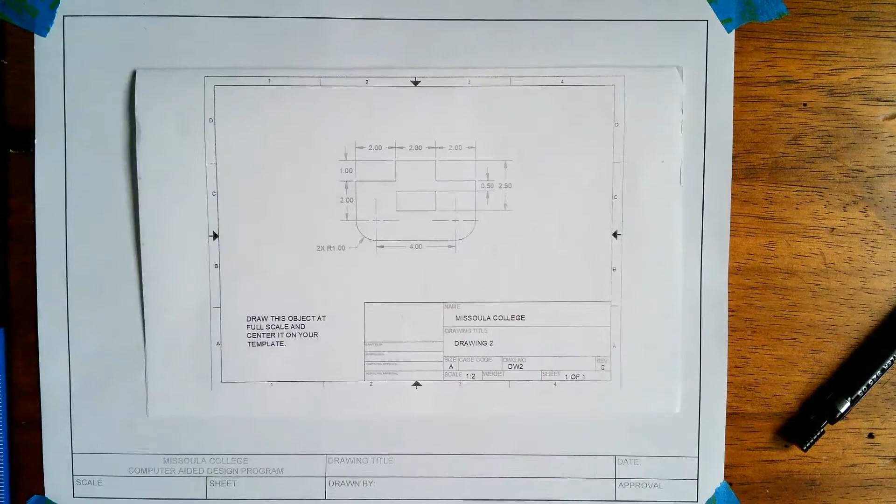Okay, so we're going to be going over drawing number 2 for the class. This was one you did as homework, so it's this object right here. I did switch up the camera angle a little bit, so hopefully this still looks okay. I tried to take the camera off the desk so it wouldn't shake every time I bumped it, but this thing will still shake a little bit, so hopefully it won't be as annoying.

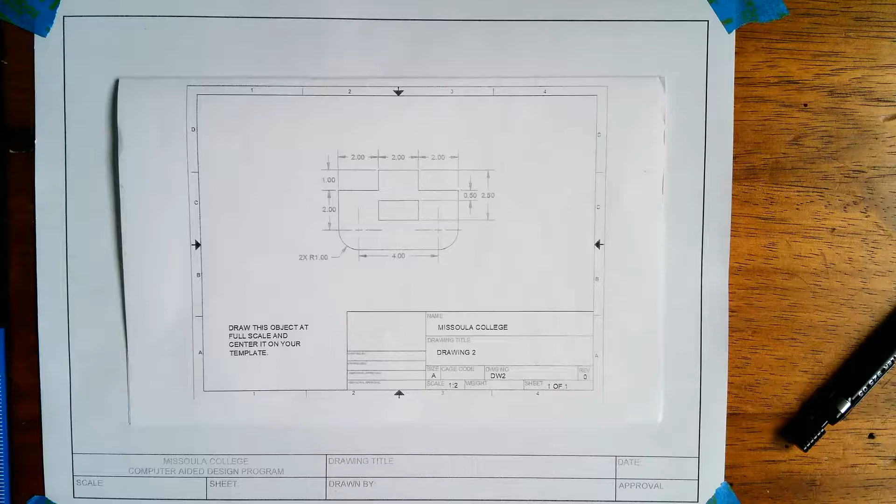So this thing is our next drawing. Now it's a little bit different because we've got some arcs. We've got like a rectangle on the inside that we need to draw, and it's not a square. But we're going to be doing this drawing the same way we did the previous drawing. We're going to find the maximum size and we're going to center it.

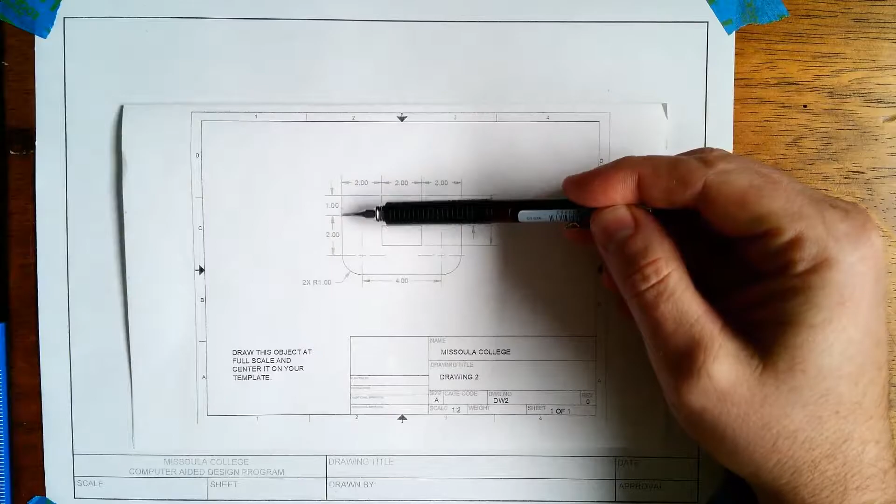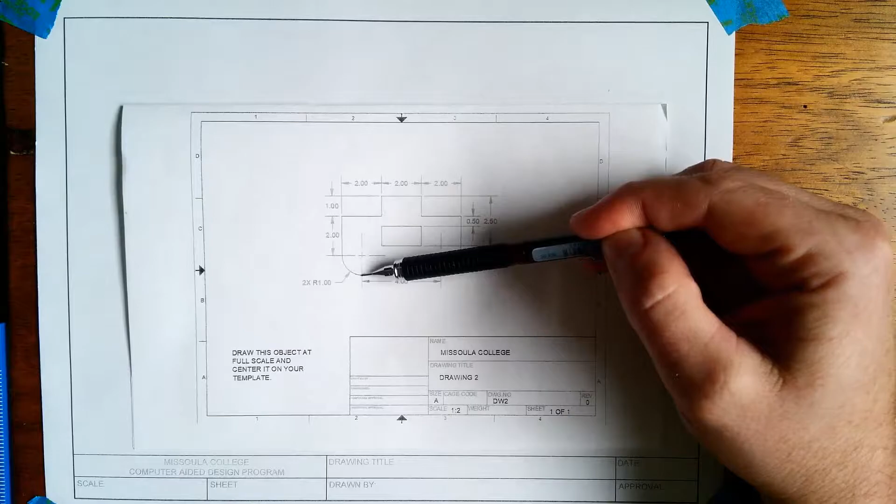So this drawing, if we go across the top, we can see that from corner to corner it's 2, corner to corner it's 2, corner to corner it's 2. Our maximum width is 6. Going down, we've got 1 inch, 2 inch, and then we've got this arc that has a radius of 1 inch. If you remember, the distance from the center to any point on that arc is the radius, and our radius is 1 inch. So from here to here is an inch, here to here is an inch, here to here is an inch, and from here to here is also 1 inch. So 1 plus 2 plus 1 - this is going to be a rectangle that's 4 by 6.

So to start, I've got my drawing sheet taped down. I did reuse the tape from the last drawing sheet, which is nice. Got my 0.5 pencil. So the exact same thing.

I've got 5.05 as the midpoint of that line, which is the bottom of our drawing area. I'm going to grab my triangle, vertical line. This should be 6.9, which if we divide 6.9 by 2, we're going to get 3.45. So 3, 3.1, 3.2, 3.3, 3.4, and then 3.45 is just right in at the halfway point.

So now, got my horizontal line going across. There's my center. I'm going to now center my rectangle on this sheet of paper, and my rectangle is 4 by 6, so it's a 6-inch width. So I set half of 6 is 3. So I set 3 inches at the vertical line, and then I can make a mark at 0 and a mark at 6. So there's my 6-inch width.

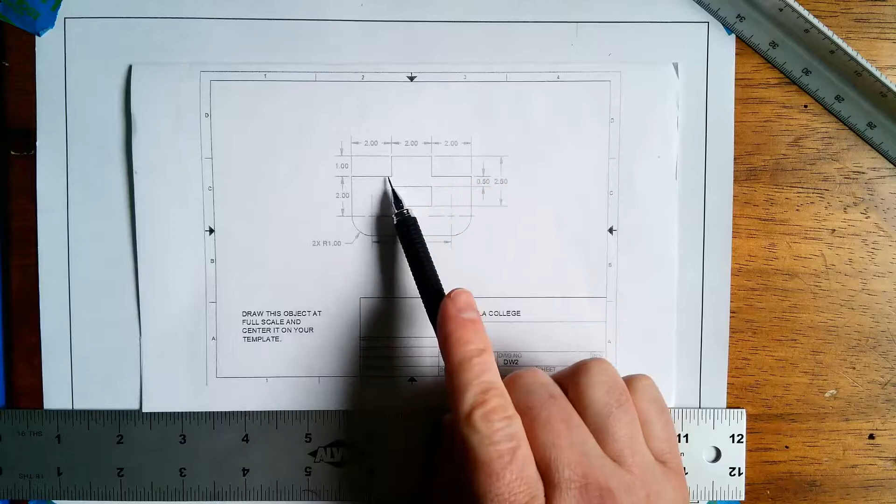And so now what I'm going to do is just start working my way in. I'll probably draw this top part first. So this is down 1 inch and then over 2 inches. Same thing on that side.

So what I could do is measure down 1 inch from this corner. I'm just setting my 0 at that top right corner, make a mark at 1 inch. And then I get my horizontal line going all the way across. Can then set my scale.

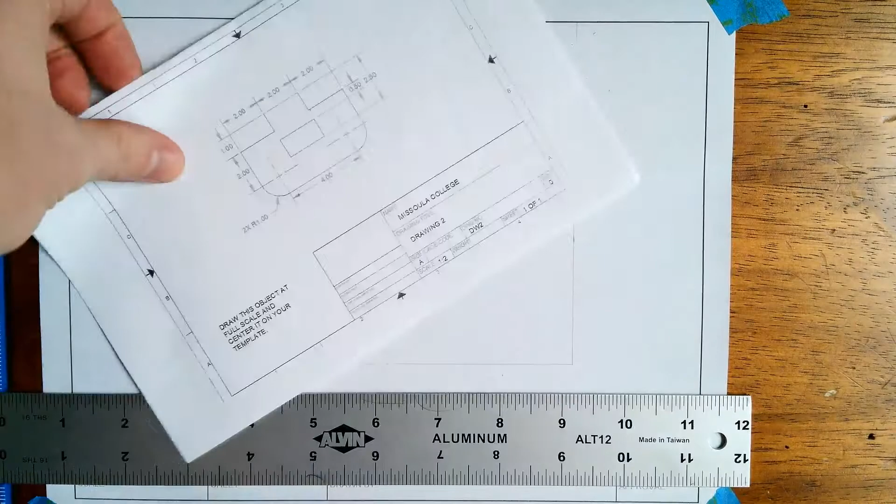I could do it here or on that top line - I might do it here. And then mark in 2 inches from this side, and then in 2 inches from that side. So I'm just making these 2 points right here. And I could draw my vertical lines there and there.

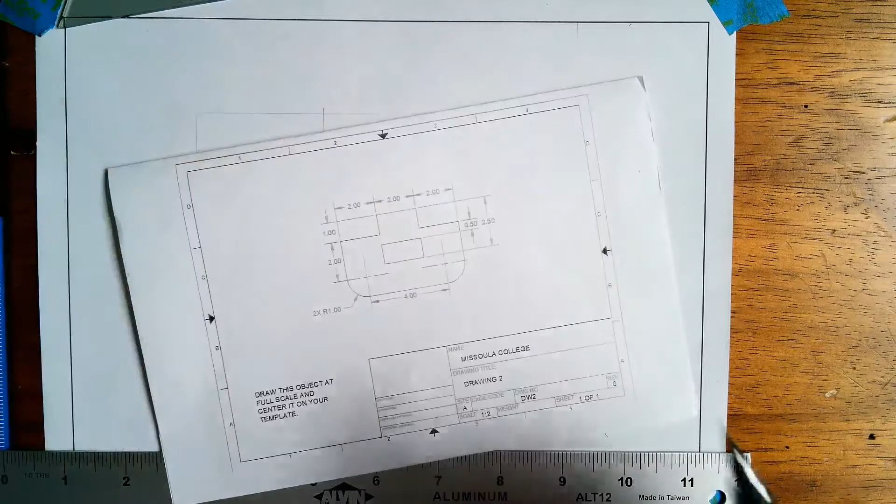Might as well stick with the outside, so I'll draw the arcs. So again, I need to find my center marks. It's going to be up 1 inch and then over 1 inch, so just like I did before.

And I'll mark both these off at the same time just to try to speed up the process here. So I'll come in 1 inch from that corner. Same thing here - come in 1 inch, make a mark. 2 vertical lines, somewhere up there, somewhere up there.

And it's up 1 inch from this corner, so I'll go from 1 to 0, make a mark, and I'll go all the way across. Now I've got my 2 marks for my arcs.

These arcs have a radius of 1 inch, so I will find my 2 inch diameter circle and do the same thing. It's a little harder because you only got 3 lines, depending on how long your vertical line is, to line it up.

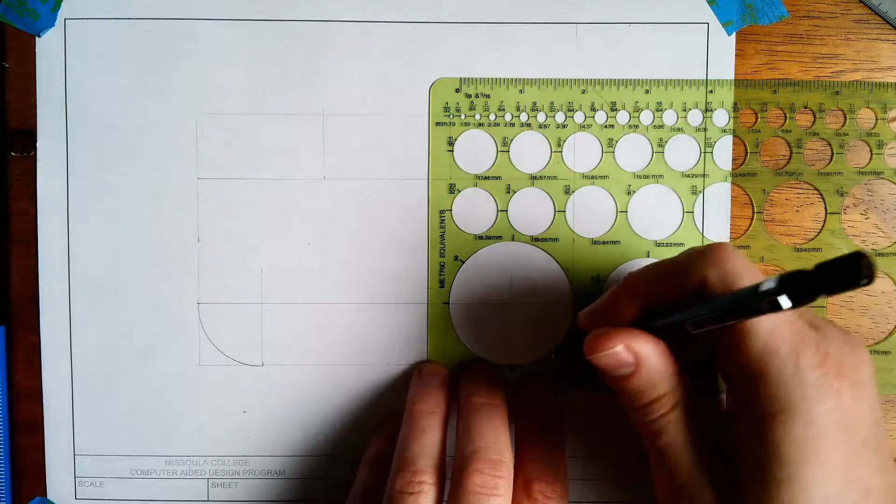I'm just going to draw that quarter of the circle, my arcs. So now I've got this center part, and it's missing a measurement here, but what we're going to do is go down from this corner 1/2 inch and then draw this rectangle, which is 1 inch by 2 inches.

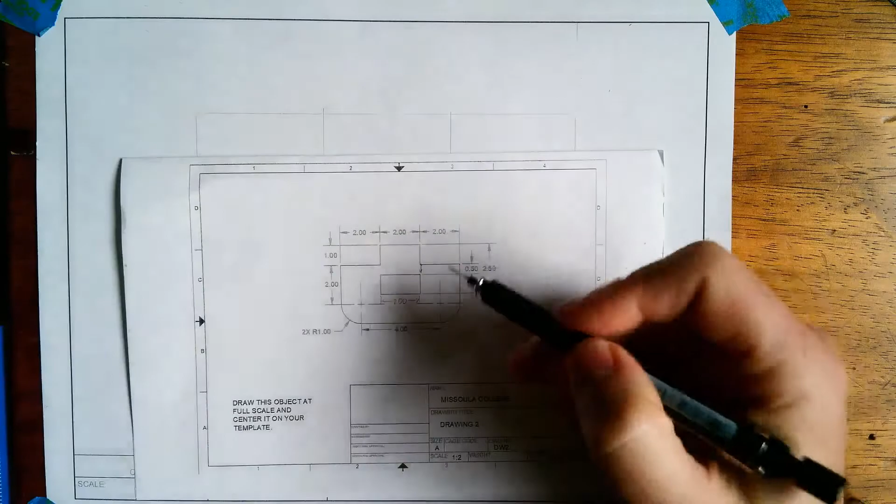I need a measurement here that says 2 inches. I need to fix that. So down 1/2 inch and then 1 inch by 2 inches.

So I need to draw a vertical line coming down a little bit to make sure I do this the right way. So I'm going to come down 1/2 inch, which is also 0.5. So 0.1, 0.2, 0.3, 0.4, 0.5.

And then from there, I'm going to come down another inch, just like that. 2 horizontal lines. Measure over 2 inches, mark it, and then my vertical line.

There we go, so those are all of my construction lines. Now what I'm going to do is clean this up and then darken in everything.

So I'm going to start with these arcs, clean those up. I should figure out like an edit or a fast forward. I'm just going to upload these as is, so I'm not going to go in and try to edit them. That would just be a little bit too much work.

Let's see here, I'll leave those for now. I'll get rid of this. So that looks pretty good. Maybe up there. So now switch from 0.5 to 0.7. Get rid of the t-square.

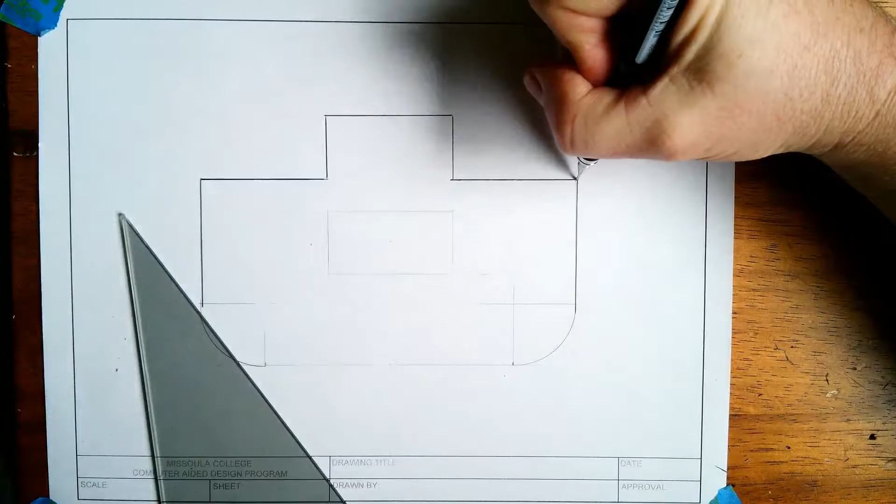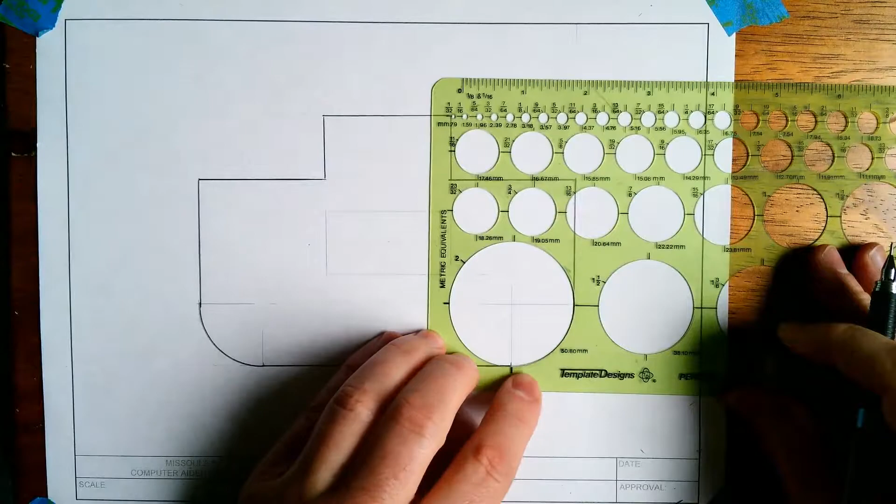So down here as well, I can hear it digging into the wood. Okay, so back to my template. Get that in. Then I could darken up that inside rectangle, so darken that up.

So it's not entirely perfect, some of these corners are off. I'm just kind of going a little bit faster than I normally would so the video doesn't get too long. But there it is, that's the object.

It's centered on the page. So if I measured, here's one way to check that. If I measure the distance from here to here, I get a little past 2. Same thing here, a little past 2. If I go this direction, a little below 1.5 here, a little below 1.5.

So that's all you've got to do. You could go through and do the measurements next. There doesn't appear to be anything weird for the arcs. You could dimension it the same way you did the circles. There are some interesting ones.

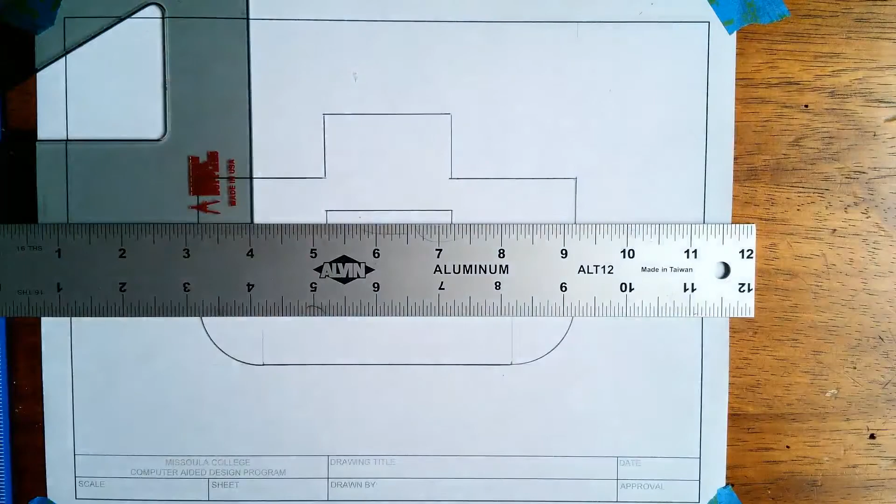Actually, I'll show you this real quick, so you can cross dimension lines. So find my 0.5, there it is. So for these 2 dimensions up here, this is kind of an interesting thing. I'm going to leave a gap and then come up to here to this point and then go like 1/2 inch past, and then gap 1/2 inch from here to here.

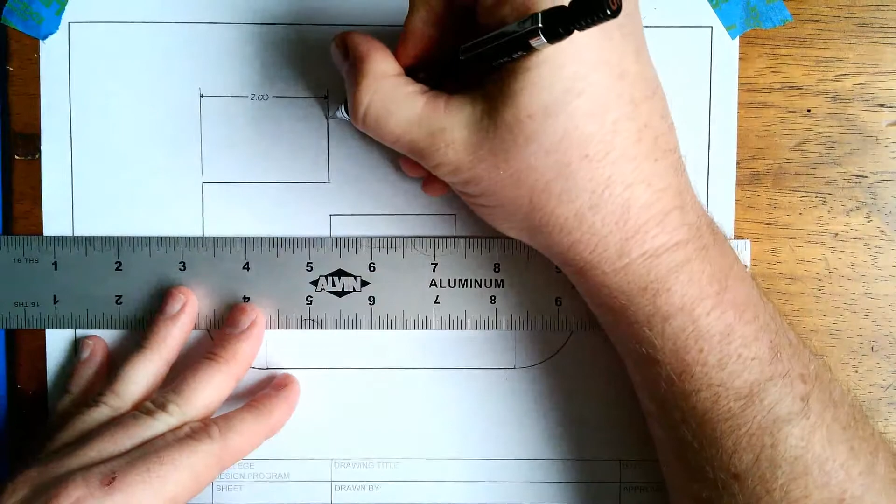And then dimension line, leave my space, 2.00, add my arrows, and then when I want to go to dimension this height right here, I can gap it, and then these lines can intersect and then go past 1/2 inch like that. So they're intersecting past 1/2 inch, and then down here I'll gap it and go out 1/2 inch and then draw.

And you can compare it with the triangle. So see how this one comes in a little bit past. So I could clean that up if I wanted, it's not a really big deal. I don't want you measuring them, but if it looks off, which this one kind of looks off.

I could erase it just a little bit. So if it looks off, fix it. If it's off, but you can't really tell, don't worry about fixing it. So these lines intersect, the dimension lines or the extension lines can intersect like that. That's going to be okay.

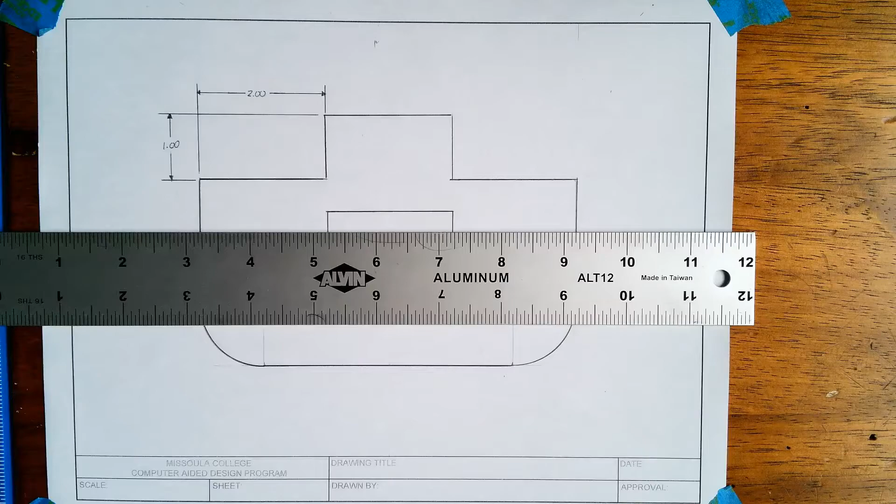So that's really the only thing that I see on here that's a little bit different. So at this point you would just go through, do the rest of the measurements, fill out the title block. You could call this one drawing 2, and you'd be all set. Thanks.